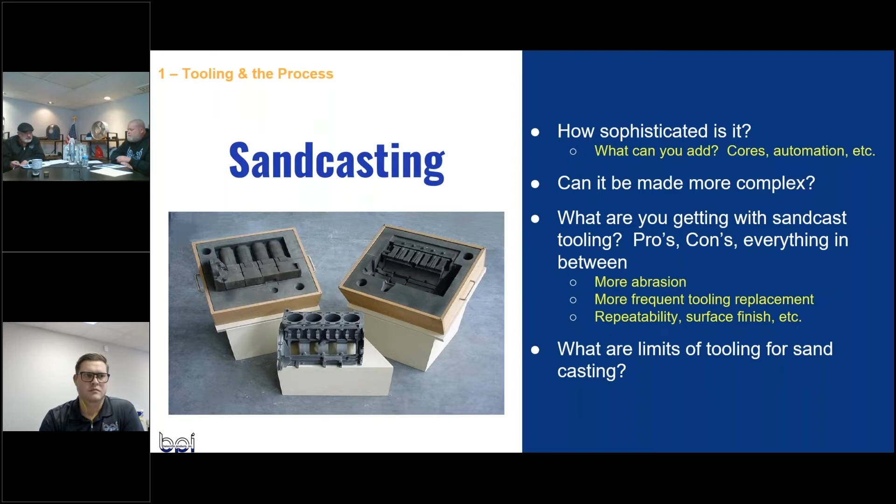Good. So the next topic we're going to talk about is permanent mold tooling. And why do you want permanent mold tooling? Well, you get better tolerances than you do on the sand side. You are cutting impressions into steel dies that are repeatable through the casting process. There's some advantages in the fact that there's multiple ways that you can gate a product in permanent mold that you may not get from the sand casting side.

There's multiple ways of casting troublesome sections, so to speak, like flat walls with side pulls, different metals you can use in the tooling, depending upon how long you want to cast the product. And then you can have multiple parting lines. That's a great advantage with permanent mold. Surface finish is better. You get a pressure tight casting because you're gravity fed and you're trying to eliminate the amount of porosity that goes into a casting.

The other thing that you can do with permanent mold is place sand cores in it to create wireway passages or waterways for different types of designs. Tim, you got any thoughts? Mold material, mold size? So there's multiple mold materials used in permanent mold, and like I said, it's dependent upon the type of quantity that you're looking to get out of your tool.

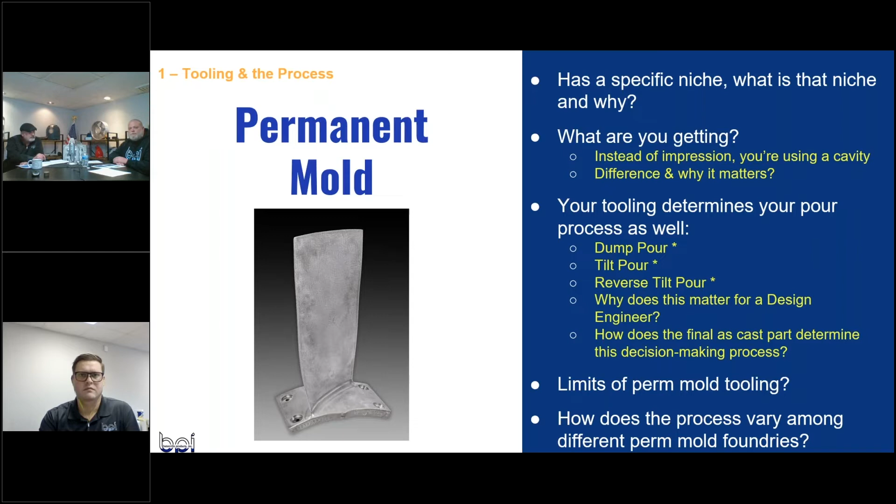Yeah, we see a lot of the industry, a lot of automotive parts now. They're trying to reduce weight. So with permanent mold aluminum, you just get a denser part, you get a stronger part. We'll talk about this in the next webinar. But with tilt pour and permanent mold in aluminum, you're going to get probably the best properties out of that alloy compared to die casting, investment casting, or sand casting. So structural parts, a lot of that's going towards permanent mold now. Yeah, structural and pressure tightness are probably two of the biggest that people look at when they're looking at permanent mold. Yep. Thanks.

So we look at die casting now. Not too much knowledge on myself with die casting, but on the tooling side, it's very dimensionally accurate type parts. This tooling is really dimensionally accurate, let's put it that way, for lack of a better word. It's great for mass production on parts. So if you've got a lot of quantity that you're trying to run, then you want to look at die casting.

The expense is pretty high in the beginning to get it started, just due to all the complexities in the die cast tool that you have to put into the tool itself in order to get a continuous running mold. Yeah, die casting is an aggressive production process. Correct. If you've got a thin wall part and you want hundreds of thousands of pieces, I would say even starting at 50,000 pieces, you want to go die casting.

So this is an example. This little thin wall would be hard to create in sand and permanent mold just because of the size of it. But in die casting, because you're injecting the metal in there, you can get that little thin wall and cast it. And the surface finishes on die castings are really good, just based upon how the tooling geometry is done. And you can minimize your amount of draft, so you have a lot less machining when you get done with it.

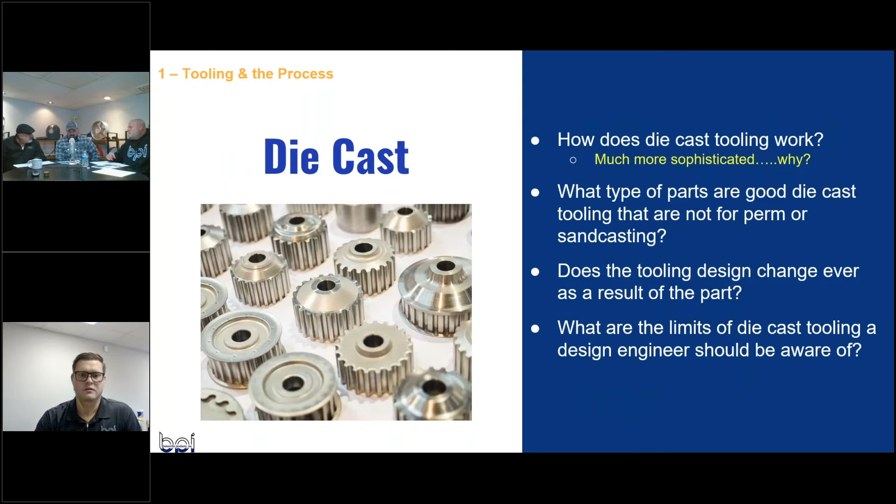Any thoughts on this, Scott? No, I agree 100%. The finish on an investment cast is a lot smoother too, correct? If you need cosmetic. Absolutely. Think about fine art pieces, jewelry, those are all investment casting. That's a good example. But we also use investment castings in the aerospace industry, motors; there's a lot of investment castings used in those different types of industries.

Hey, Trevor. Also, the material that you can cast with investment castings. So Tim's holding a piece up right now. It's probably hard to see, but it's not a great investment casting. It just has to be an investment casting because of the material. You can only cast this material in investment. It's a bronze alloy. It's got certain attributes, certain qualities.

So the only way this part can be made is to cast it. You can't buy it. This part is not made in extrusion. This material does not extrude. So it's a simple part, not the best example of investment casting, other than they need that material, which kind of leads to all the processes, right?

Because in sand, you can cast different types of materials, even into the ferrous alloys like we talked about. On the permanent mold side, you can get a little bit of the brass and copper, mostly aluminum, zinc. Yep. On the die cast side, you're kind of magnesium, aluminum alloys, some zinc. But you can't do anything ferrous in the steel tools because you'll end up ruining the tools. And then on the investment, that part was specifically driven to investment by the alloy.

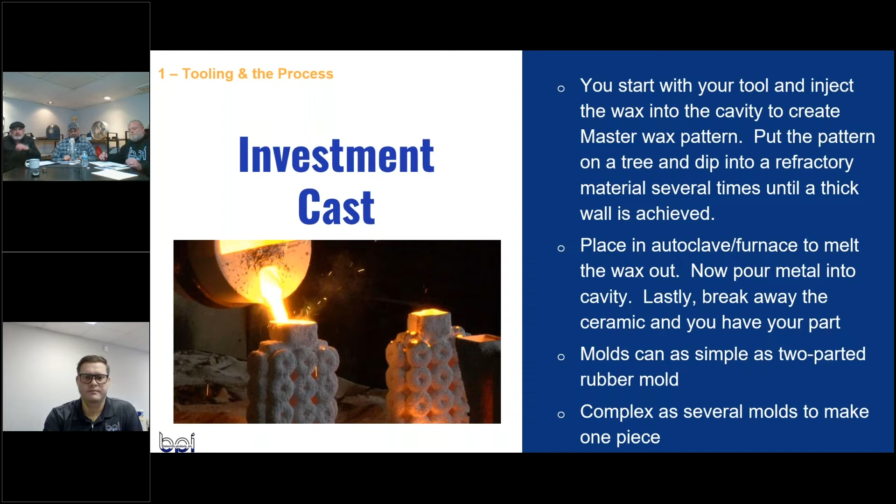Sand cast costs, but real quick, just a couple rules of thumb on your last question, Tim. Wall thickness between permanent mold and die: typical wall thickness on die casting is a minimum of about 40 thousandths. Yeah, about a millimeter. And permanent mold is 3/16, approximately. Sand is similar. And you can play around with wall in investment casting, do a lot of different stuff like that. Sand cast costs. You want to dive in on that one, Scott?

On the sand cast cost, you're dealing with sand, so you've got a lower cost as far as the process. But as far as the tooling goes, it depends on how complex you get. Because you've got an Isocure type box or you've got a shell box. So you've got to weigh out the cost as far as what kind of core you need. But on the tooling side of it, it depends on how high of a runner. It kind of goes back to everything.

How high of a runner is it? How complex is the box? How complex does it have to be? That's going to be a big driver: do you want a multi-cavity type core box, or are you looking at a single cavity just on account of the production run.

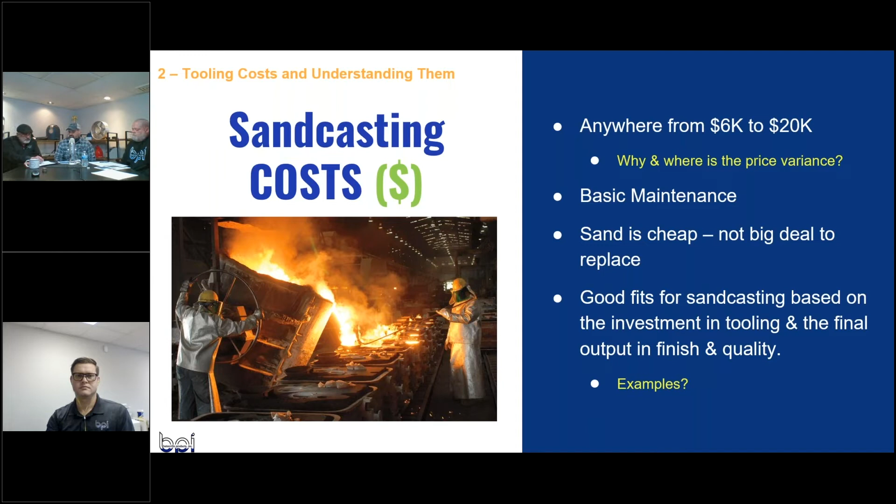Trev? Permanent mold ranges, and it's all dependent upon how complex the geometry of your part is. So you can get low cost, and when I say low cost, you're probably in the $10,000 range, up to $80,000 or $90,000, depending upon how sophisticated you get with pulls, the design of the part, and how many cavities. All that goes into the design when somebody comes to you.

Essentially, on a simple tool, you're looking at a two-part tool. You've got a simple cavity, and you're just pouring the metal and pulling the part out. On a very complex tool, you may have 6 pulls creating undercuts that you need to pull out, and then it goes in a sequential operation. All that has to be accounted for on the tooling side. Each one of those pull pieces has geometry that has to be cut to match the part. So you've got 6 of them to cut, not only the cavities for both the top and the bottom half. So there's a lot that plays into that. Scott, you probably have some good knowledge on that.

Absolutely. When you're dealing with engineering on making a tool, the engineer can make that simple project very complicated, or the other way around. It depends on what you can get away with. Do we need to cast that geometry into the part, or is it so minimal it's not worth the cost of putting it in the mold? It's a machined face, we'll cut it in there anyway. There are a lot of different options on how detailed you get. The engineering part of the tooling really dictates the cost of the tool, how involved it's going to get. Yes.

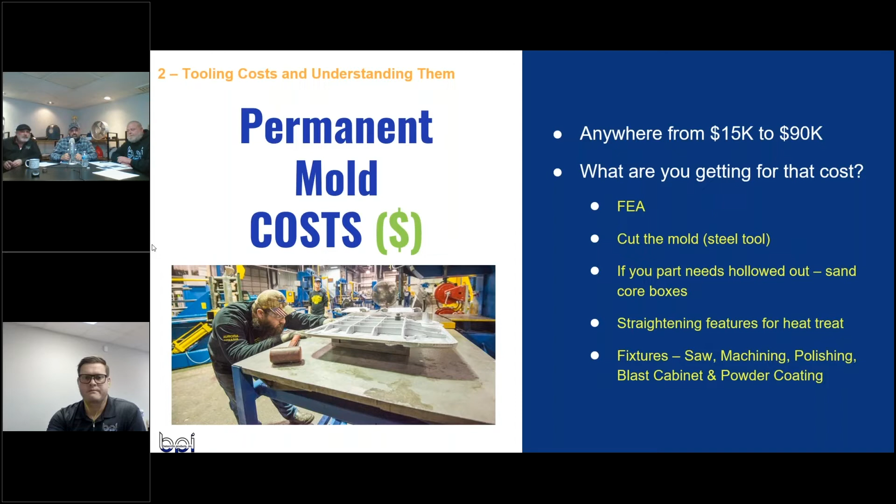Yeah, it's important when you're talking to the foundries, whoever you're choosing, to make sure they've got design capabilities that can help you out on that. Draw the engineers and the tool guys in as early as possible. In the long run, it's going to be cheaper, and your time to market is going to be a lot better. As early as you can get those guys involved, the better off you're going to be. Definitely a team effort. Yep. Great, thanks.

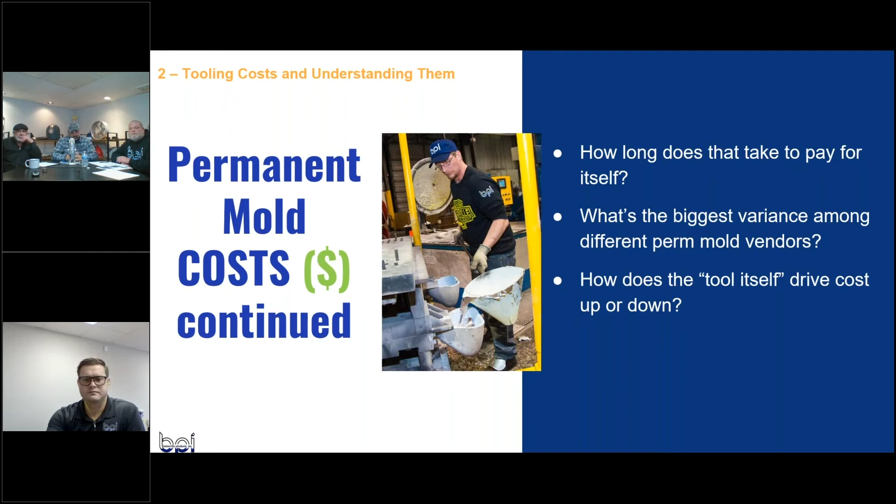So, die casting. Die casting is probably your most expensive tooling out there. A lot goes into a die cast. There are typically water jackets that need to be cut in for these tools, and fins for cooling. You've got to imagine this part is running under pressure. We're forcing liquid metal, 1300 degree metal, using aluminum as an example, into this, and we have to evacuate that heat quickly in order for it to be rapidly repeatable. That's why these are used mostly for mass production.

Your cost can range from 60 or 70 thousand all the way up to $600,000, depending upon how much tooling you need to support the die cast tool. You've got trim dies and all the other things that come into play with die casting. Yeah, die casting is just scary fast. You see a die cast machine running, it just flies. And they're built to withstand that. That's what they're built for. So if you've got a high runner, that's the route to go. Right. Absolutely.

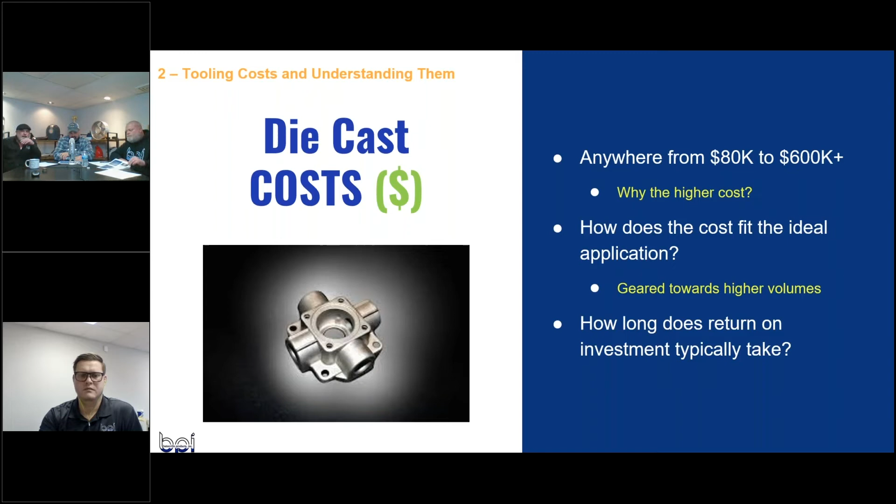Investment cast tooling costs are typically in between a perm mold and a sand casting. Again, everything we've talked about here earlier, it's just how involved they are. Is it a single, easy two-part? Has it got multiple pulls on it?

Because you're injecting a wax-like material, the wear on the tool isn't that aggressive, so you get a long life out of it. But the costs are, I think, easy to handle, easy to digest. On the low end, we've seen $6,000 tools, and probably the most expensive investment tool I've ever seen is in the $50,000 range. Multiple cavities, multiple pulls, that type of thing. So relatively on the lower end of the cost of tooling would be investment.

But again, keep in mind the piece price, because each one of those wax parts ends up being a little more involved. Yeah, go on. And from what I understand, most of your castings range from relatively small to like a 20-pound range, right? I think they get into some big investment castings, but that's a common area size-wise, kind of the wheelhouse. Yeah. As investment casting gets bigger, they get extremely expensive. And maybe we ought to talk about that a little bit.

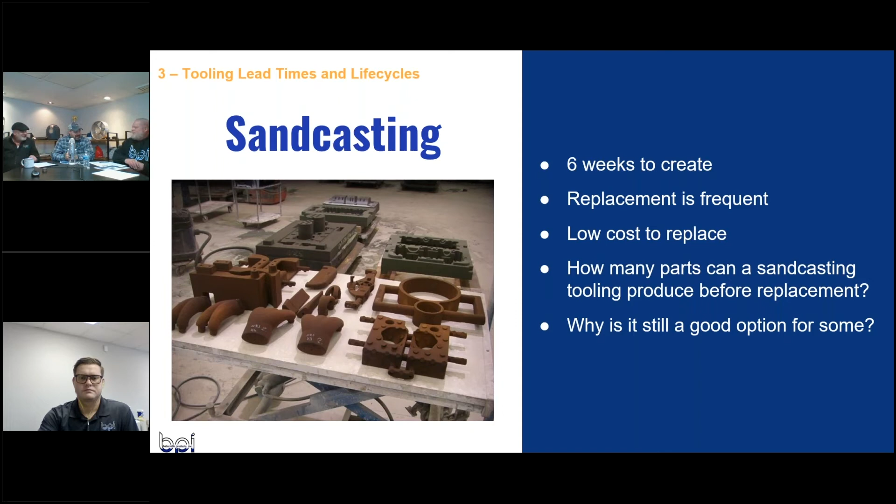So a lot of companies will typically say, hey, we can get the material on order. We'll figure out the small detail on a date code or a logo or an ejector pin, and you can always fill in those details, but you keep the project moving forward. So typically that lead time includes finishing up part of the design work. Great, thanks. We'll say the devil's in the details, and that one little detail may take you a couple weeks. Absolutely. Well worded.

So looking at permanent mold, as far as lead times, it's kind of banking right off of what Scott said here. It's kind of dependent upon how difficult the tooling design is after you get the part design for manufacture. It's how difficult it is for that tool to create that part. So if it's got a bunch of pullbacks like Scott's talking about, if it's got multiple ejector pins and we can't see these ejector pins and we got to do something there, it's all in those details that drives that lead time.

But if you're talking a simple to medium hard type of tool, you're probably looking at 10 to 12 weeks, depending upon that, once the design's baked out and we're good for manufacture. Yeah, and I think we almost scare people off too. I mean, castings are cool. There's stuff you do with a casting that you don't really do with other processes.

So if I'm a designer, I ask for the world. I bring it to you and it's got ribs and it's got logos, and you come back and say, look, if we put the logo over here, we can do it, and it's not going to impact too much. Or if we put additional draft on these ribs, or a lot of draft on the logo. I think we need to keep in mind that there is a reason to go to a casting, because you can do so much with it. There's so many options. We're taking it from a fabrication to a casting, which we do a lot. You're right. Absolutely.

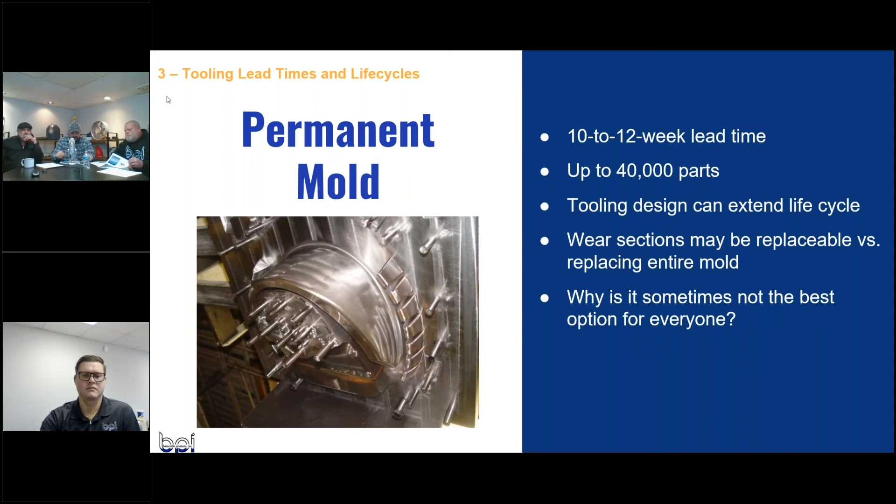So die cast, do you want to talk about that one? I'll let Scott talk about that one. Die cast can be very, very involved. With what background I've got in it, there's so many fine details to it. Like Trevor mentioned before, you got your cooling fins, your cooling tubes. I've seen companies where just their cooling process to get that water to the area they need to chill could be a pretty complicated orifice. It has to be line bored with a thread, and they want a thermocouple on it. So it's very involved.

When you're dealing with something like that, your fits are going to be very tight because it's going to be pressurized. So any of your offset partings, all that has to seal off really good, because you obviously don't want this material squirting out into the mold itself. So there's a lot more precision in that type of tooling, and precision means longer lead times and a much higher dollar price tool. Yeah, probably a lot more checks and balances while the tooling's being made, right?

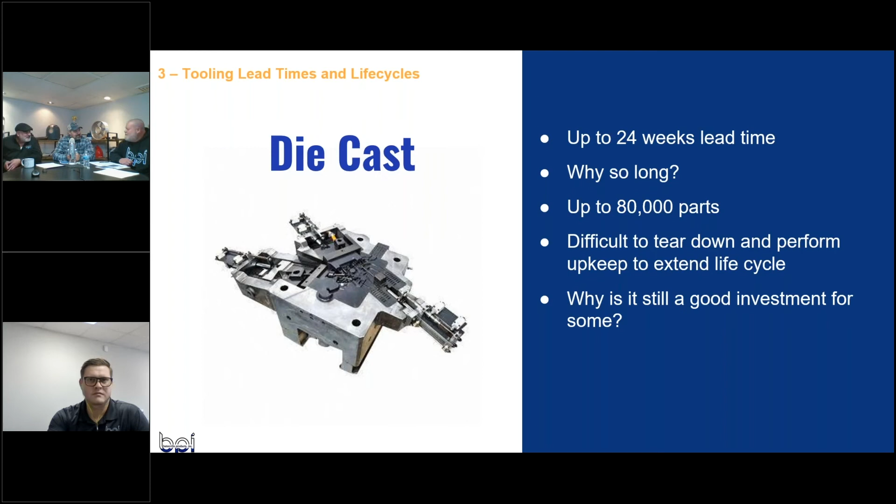Yeah. And kind of like what Tim's saying, the casting part of it, with every single tool or any particular job you do, there's so many directions the job can go, and it's all for a very good reason. At the end of the day, you got to make all these decisions on the casting. Even when you're shopping around, is it going to be cheaper to make a die casting or permanent mold? That's all part of the decision making, and that's what we all try to help the end customer with, depending on the volume and where this project's going. You could save a lot of money and a lot of time with a little bit of forethought up front.

So investment castings, lead time on investment tools is going to be typical or a little bit quicker than a perm mold, because again, you're typically making something out of a solid or casting it. So, 8 to 12 weeks for a typical lead time. I've seen them as much as 16, but they're not too hateful. They're pretty straightforward, and you can get them kind of quick. You don't have a lot of the issues you have with some of the other methods.

Again, it's so versatile and repeatable. If you need an investment casting, the tooling life is not going to be an issue. Yeah. And plus, it all kind of depends upon that design too. If you got some undercuts in there that you got to be able to cut into the tool itself to create whatever, then that's going to cause you some time too.

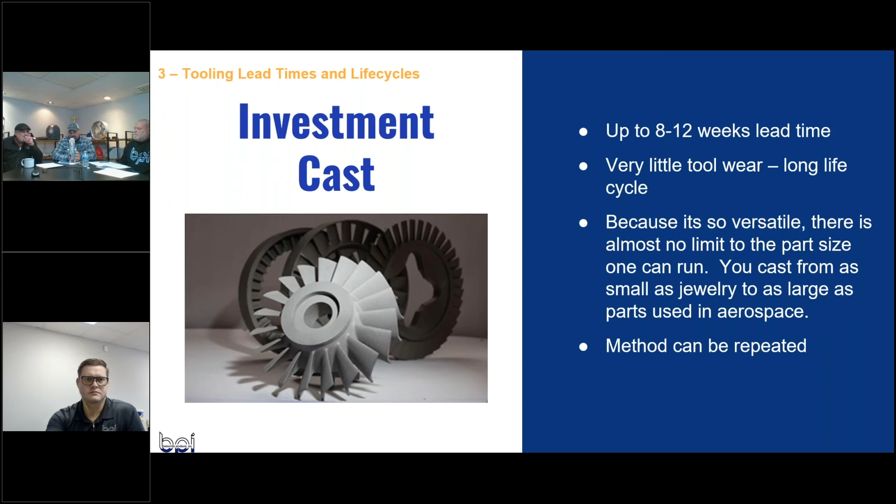Guys, I think with that, these are the three sections that we hit across the four specific processes. We did have some really good questions come across I'd like to get answered now. And again, if you do have any additional questions, please put them in the questions section here.

Can permanent mold be modified to accommodate changes? So you guys have mentioned it being cut into typically a steel mold. Is it modifiable to make changes as they come up? So to answer that question, yes, it can be. Now, the best way is if the tool is metal safe, that's the easiest way. If it is not metal safe, and what that basically means is if the cavity is getting bigger or the core is getting smaller, that's metal safe.

If you've got to go the other way where the core gets bigger, you probably have to make a whole brand new piece. And if the cavity gets smaller, either you're going to have to insert the tool or you're going to have to weld that tool up and recut. So it's all dependent upon what you're trying to do there. But yes, fairly simple to do changes in permanent mold. It's just costs are different depending upon whether it's metal safe or not metal safe.